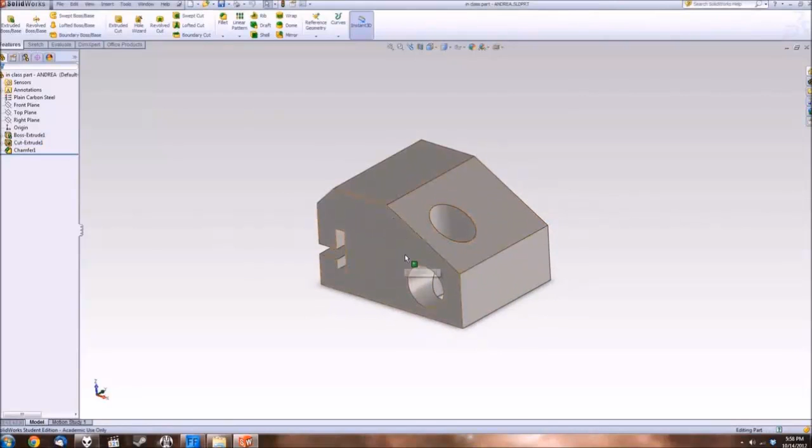So the way to do that is just have the part open that you want to make a drawing of in SolidWorks, and then go to File, New, and create a drawing. You can pick from a bunch of standard sizes up here, or you can go to Browse, and then you have everything that SolidWorks has, drawing size wise. For this one, I'm just going to pick A landscape. That's a pretty common one, and say OK.

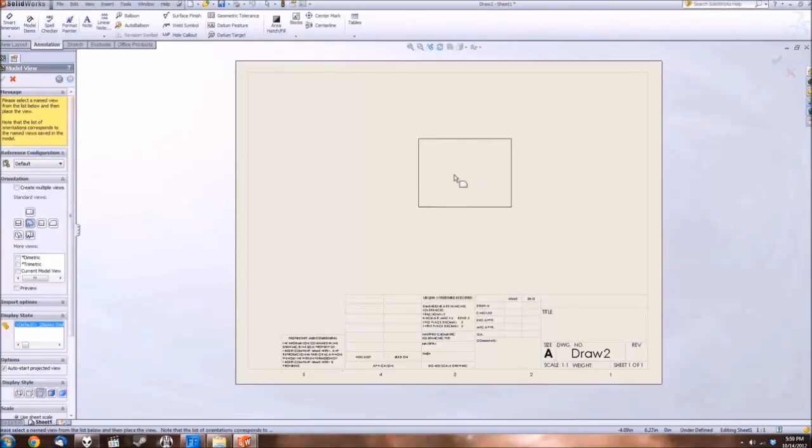Now, what you'll notice here is you've got kind of an outline of what the drawing is going to look like - a parts list space, a little bit of namespace, and you've also got this model view menu open over here with the part we had open in SolidWorks in this list. So we're just going to double click on that, and we can drag it out onto the surface of this drawing, and you see an outline - that's where the part's actually going to go. So we can click that just anywhere in the middle here, and notice it shows, in this case, a top view of the part inside our drawing.

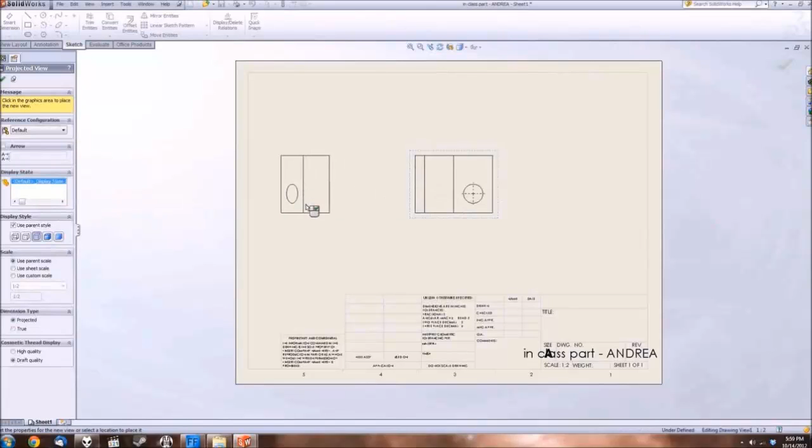You'll also notice that if you click over to the left, up, down, right, isometric, whatever, it'll show projected views based off of that drawing. So you generally just build up whatever you want your final drawing to look like based off of these projected views. That keeps dimensions between, say, this top line and this line consistent, and it lets you cut down on the number of dimensions you actually have to throw on.

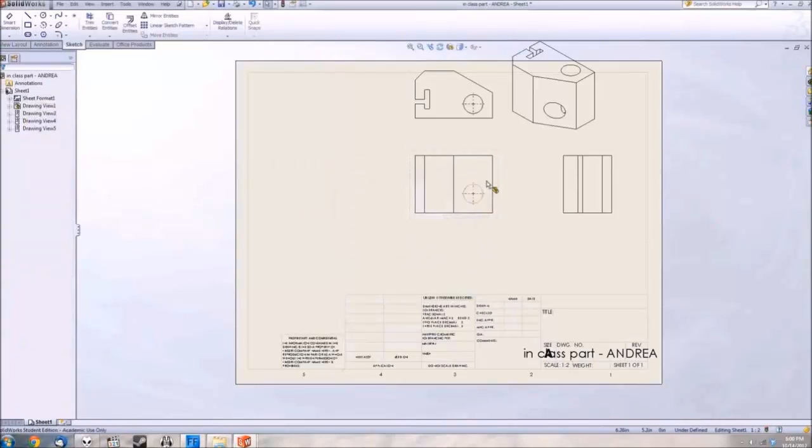So let's say you didn't quite get this right the first time and you want to actually add another model view. You can do that just by deleting all this stuff, going to View Layout, and inserting a model view here. So I'm going to put my top view here, do a side view, and that view is not particularly useful, so I'm just going to do an isometric view here, and I think that's enough to dimension this part.

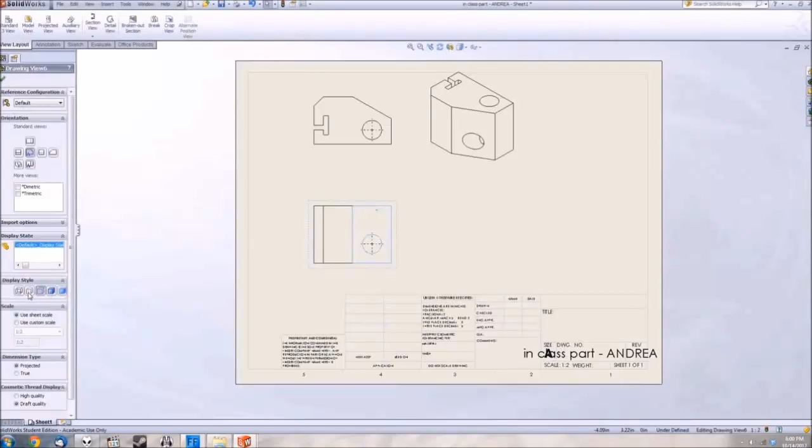Also, you can see you've got display style options up here. So I'm going to go back in and actually change it so I can see the hidden lines, just so I know that this hole does actually go through all the way through the part there. And you also notice that I can drag these around, but it always keeps the dimensions constant. Lines that are supposed to be the same are kept that way. And then the isometric can kind of go anywhere.

But all that's really left to do on this is add some dimensions, and you do that with Smart Dimension just like you would in a sketch when you're creating a part. So I've clicked Smart Dimension up here, and then I can just click this face, and oh, that's 4 inches. You notice I don't have to type in any numbers - it's already got that since you're building this off of the part file.

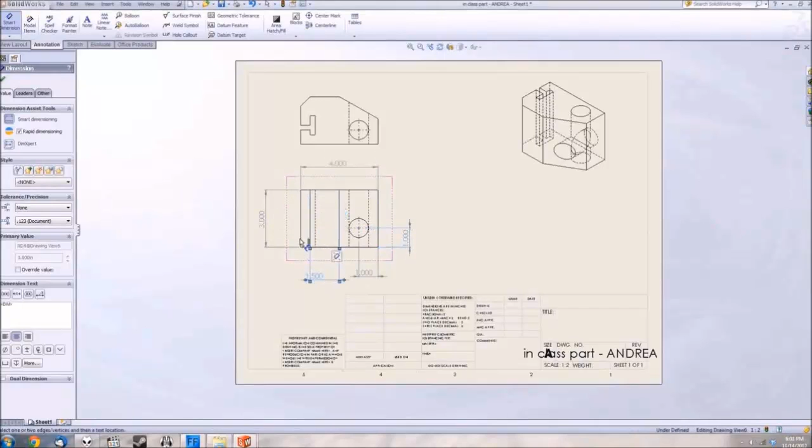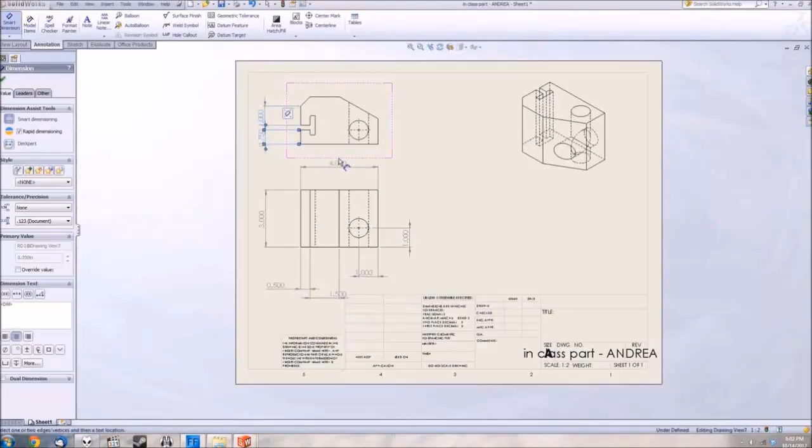So I say that one's 3. I can say that edge, it's an inch off there, inch off there, there to there's inch and a half, there to there's 0.5. Now, since I've done this 0.5, I wouldn't want to do there to there, because I'm already showing it down here. So really all I need on this one is some of this stuff, and maybe go ahead and give a few of these.

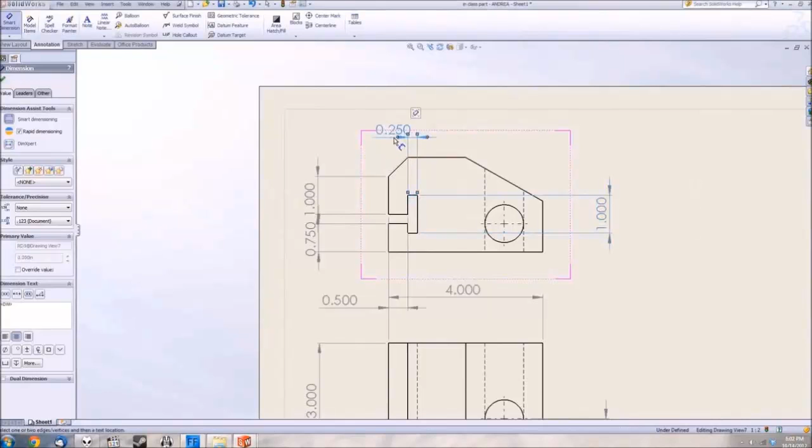But that's one thing you just have to think about - you have one dimension covering each section of your sketch. I've still missed a few on here, but it's something you just have to be very careful about getting everything you want on there. So that's pretty close.

Let's say you're finished with the dimensions and you just want to add your name onto this. So you can either just click the Note button up here under Annotation and just start typing, or you can right-click onto this, say Edit Sheet Format, and actually go into these boxes and say, okay, well, I want this to be your name. And that's great.

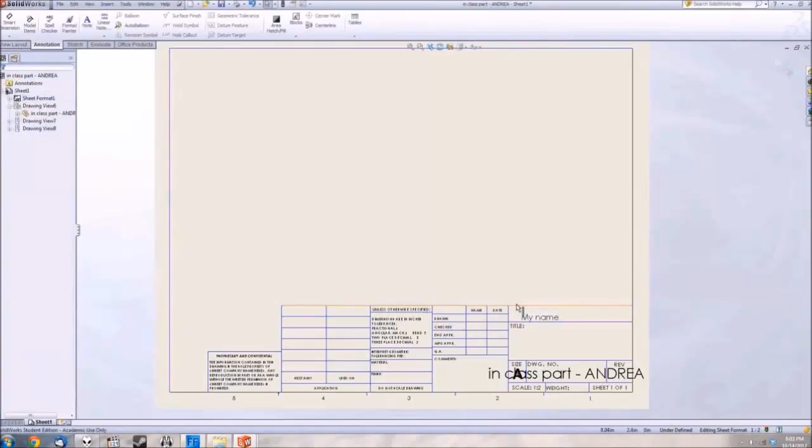You'll notice that all of my drawing stuff's gone - it's not deleted, don't worry about it. Just click this button right here, and you're back. Also, on most of our drawings, we've shown that the isometric view is actually filled in, so just go back here on Display Style and change that back.

If you want to change the scale of any of these drawings, you just go down here to scale and usually just use custom. Right now we're at 1 to 2. Let's say I wanted to be 1 to 5 - now it's really small. 2 to 1, it's gigantic. So we'll go back to 1 to 2. That's great.

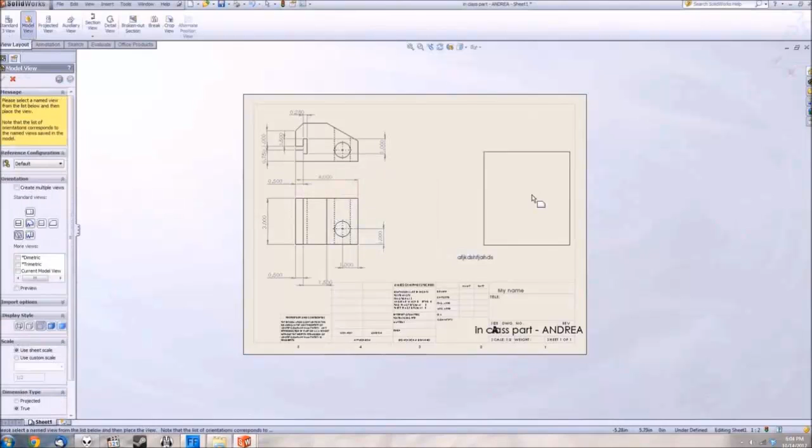One more thing - let's say that this isometric view isn't the actual isometric view you wanted. That can happen if you set up your planes just slightly differently than somebody else who did this, and it's kind of frustrating to deal with. You can't just use the default isometric. The easiest way to do that is just delete this view and insert another model view of that part, just an isometric, and only that. So we'll click OK.

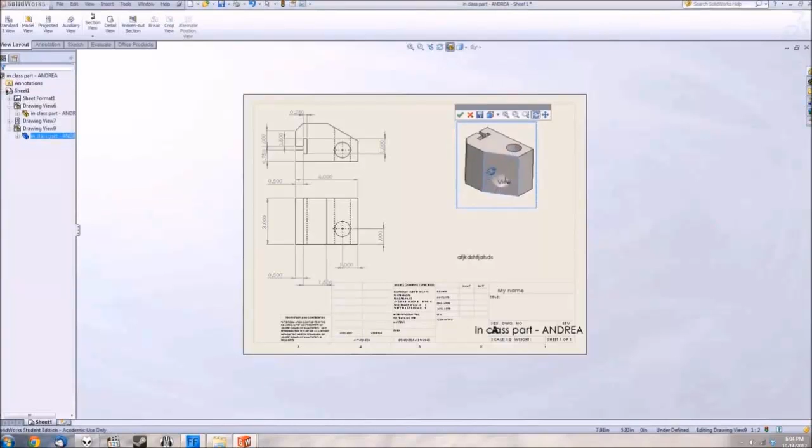Position this a little bit how we want it. Go ahead and change the display style again. But now, since we've got just this one view in this section, we can come up here and click this 3D drawing view button. What that does, once we click it, is let us actually rotate this section, say we wanted our isometric to actually be like this. We can do that - we'll click the check, and now it'll actually stay like that.